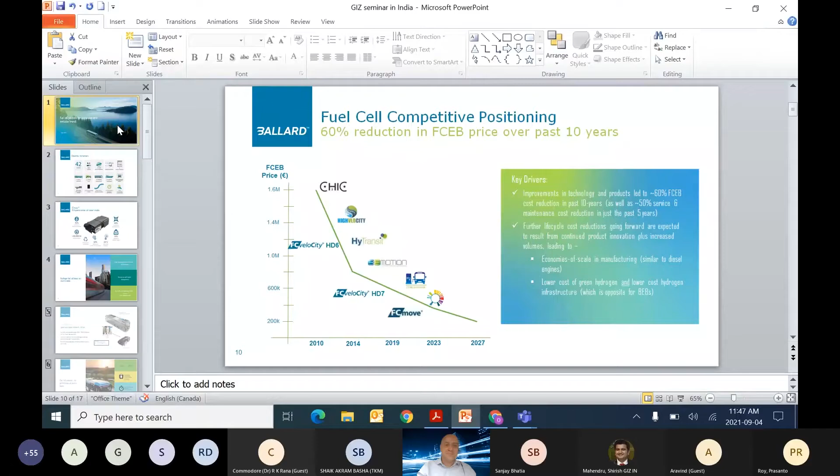So you would have about 10 minutes. Yes, sir. Okay, here we go.

From 2010 to 2014, I myself lived 4 years in India. I stayed in Pune, Aurangabad, New Delhi, and Mumbai, and I keep this memory in my head very fondly.

Just to mention briefly about Ballard, we have been designing, manufacturing, and selling fuel cells for more than 42 years. The company now has a little bit more than 900 employees, fully focused on fuel cells. We are omnipresent in e-mobility, with about 1,300 fuel cell buses globally running with Ballard fuel cells, over 2,200 trucks of various kinds running with fuel cells. We are involved in 6 train projects and 8 ship projects, and we also design and provide fuel cell stack technology for various automotive OEMs.

So far, we have produced close to 1 gigawatt of fuel cells in-house, and about 6.5 million MEAs. We do our R&D in-house. Our vehicles with Ballard fuel cells have absorbed close to 100 million kilometers, providing very important input to our future product development. Our stacks have also achieved a milestone of 35,000 hours lifetime without an MEA change. As a company, we are fully committed to carbon neutrality, aiming at 2030 to be fully carbon neutral as a corporate.

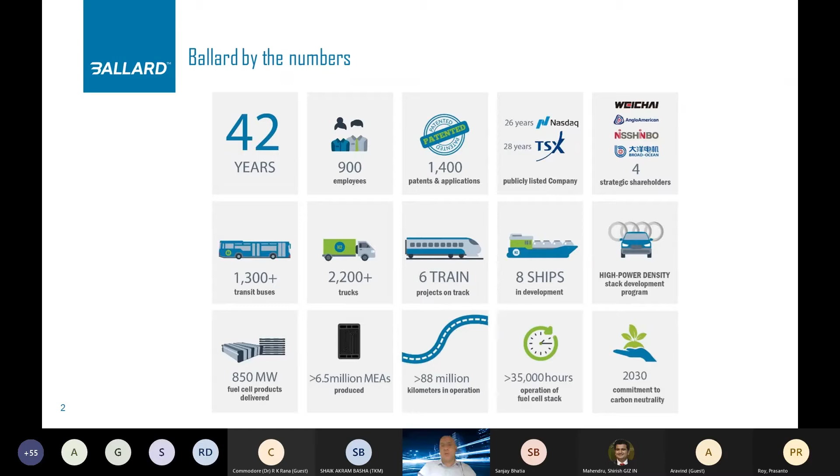This is our 8th generation fuel cell module. As mentioned, a number of vehicles have Ballard fuel cells, and in the past we developed 7 generations of fuel cell. From generation to generation, we have focused on lowering the TCO and increasing the features of the products. In this 8th generation, which we are now shipping on a serial basis to our vehicle OEMs, we have achieved a 35% reduction in total life cost, including both the CapEx and the OpEx of the product.

How have we done this? We have focused mainly on durability, increasing the durability of the stack as well as working with our industry partners to increase the durability of the balance of plant components, and also improved the design of the product, simplifying it from generation to generation. In this specific generation, we decreased the number of components by integrating certain functionalities, by 50%. This lowers the preventive maintenance cost, lowers the corrective maintenance cost, and increases the reliability of the product.

Overall, we achieved a 40% reduction in the product volume, increased the power density, and lowered the weight of the product. In many applications, the weight is very critical, so lowering the weight allows either carrying more goods or more passengers. We also added some cool features like freeze start capability from -25, which is important especially where I live in Europe, in the northern countries, where there can be severe winters.

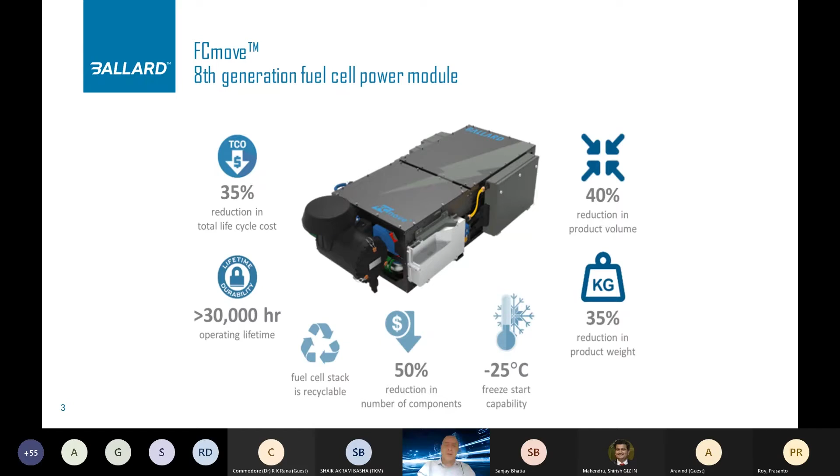I want to mention a couple of things, especially how we aim to decrease the TCO, using fuel cell buses as an example. The first point is that fuel cell buses are electric buses, and there's sometimes a misperception in the market that they are treated differently, but they share the same electric drive as battery buses. It's a hybrid battery fuel cell combination, and both technologies have their strengths, so combining them brings a very strong value proposition.

We have lots of OEMs now on the common platform, offering their zero-emission buses. It can be a battery bus, but depending on the application, they can also change some of the battery compartments with fuel cell and hydrogen and offer fuel cell buses. That's what our OEMs do.

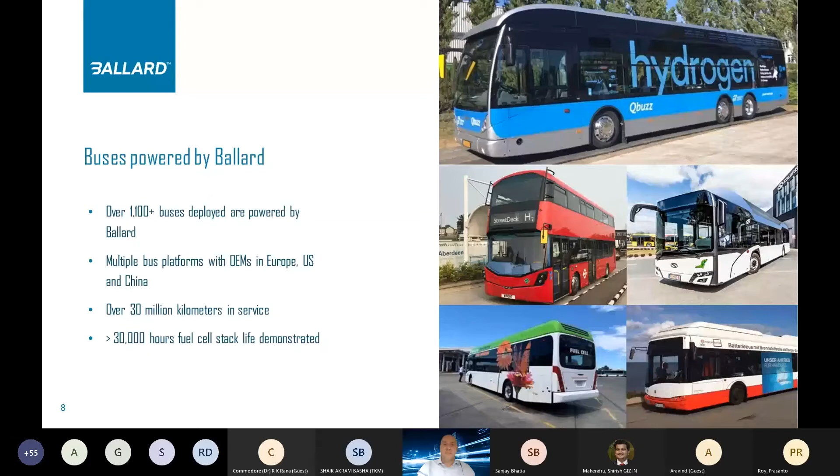There are a couple of examples I give here. On the top you see a triple axle 12-meter bus, and on the right side in the middle you see a double axle fuel cell electric bus. Double deckers are very popular in some countries, so we see an increasing number of double deckers in, for example, the United Kingdom. In places like China or some other countries, 9-meter or 10-meter buses are also very popular. We also have buses with Ballard fuel cells and articulated 18-meter buses. So the product platform is increasing day by day.

There are some reports that have been done by the Hydrogen Council, or together with partnerships with Ballard, for example with Deloitte, based on deep analysis. All these reports show that there will be a timeline in the near future where fuel cell electric vehicles will be either equal to or cheaper than operating battery electric vehicles or internal combustion engines, depending on the application, of course. This is not a one-size-fits-all situation. Electrification is a big problem to tackle, and we believe fuel cells are an important part of the solution.

I'll give you some examples of how that's happening. Here you see a fuel cell bus price, how it reduced over the last 10 years. 10 years ago we were doing demonstration projects of 1-2 buses. We have been involved in European demonstration projects since 2004, from the very first bus put on the street in Europe. As of end of 2021, there will be 220 fuel cell buses in Europe with Ballard fuel cells. But generation over generation, the price of the fuel cell bus came down from upper million euro prices to almost 500,000 euros in tenders today, and we expect that to go down to below 300, approaching 200 in the future.

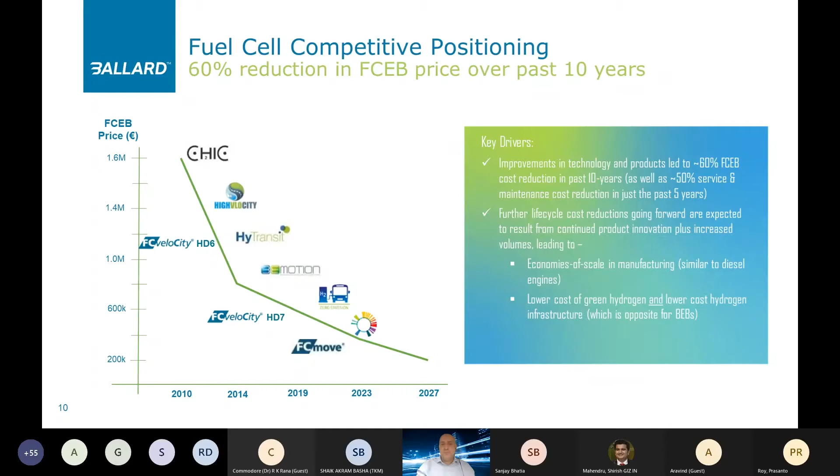I'll give you some performance criteria which allow the TCO to come down. We have proven more than 450 kilometers of range in the field, fuel consumption less than 8 kilograms per 100 kilometers, and fuel cell stack durability over 30,000 hours, actually 35,000 hours, proven in revenue service.

So these are not demonstration projects that run empty, these are buses that carry passengers online and deliver service to customers. At this moment, in our various programs, our customers are able to offer fuel cell bus maintenance cost of 0.3 euro per kilometer. There's a target with a number of partners to bring that down to 0.2 euro per kilometer for a 12-meter bus, and within that we are also aiming to bring fuel cell maintenance cost below 0.1 euro per kilometer. That includes preventive maintenance, corrective maintenance, labor, all the things you need in the LCC.

We have also proven fuel cell module availability. At this moment, over 100 buses are running on the street, and we track every day the performance of the buses. We have over 97% availability of the fuel cells, and we track other environmental conditions required in cold or warm climates, such as freeze start, which is especially important for colder requirements.

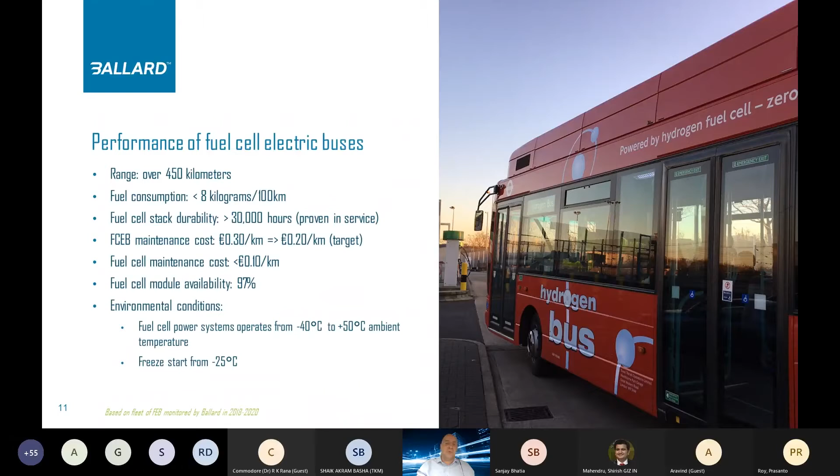There are other reports which show when we will reach this equilibrium, and it's of course a hydrogen economy question. It's not only the vehicle, not only the fuel cell, it's also the fuel, it's also other services. But if you look at various reports, either from the Hydrogen Council, McKinsey, or Deloitte, you see a timeline around 2023, 2024, 2025. That's where we expect fuel cell electric buses will become either equal to or cheaper to operate than various other technologies.

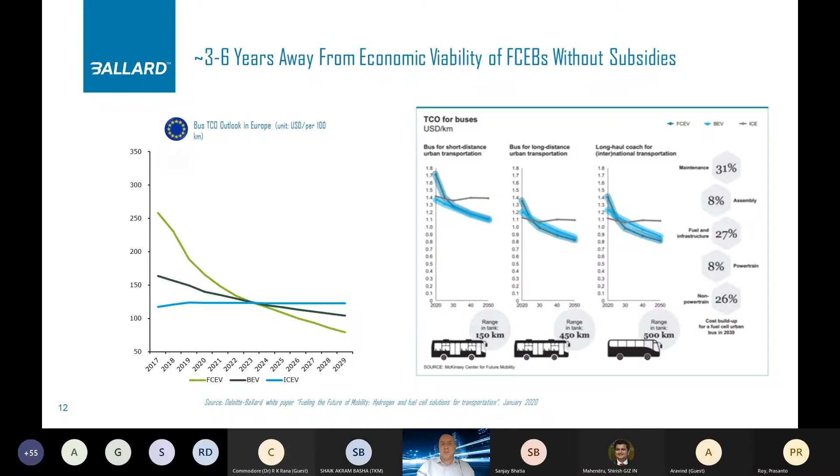Our experience in the past is that talking to fleet owners, when you want to operate a few buses and demonstrate the technology, it's always easy to start with battery electric buses, because building the initial infrastructure is easier. But when you start scaling up, then the infrastructure becomes a big bottleneck. And as the scale up comes up to the reality, then operators understand...

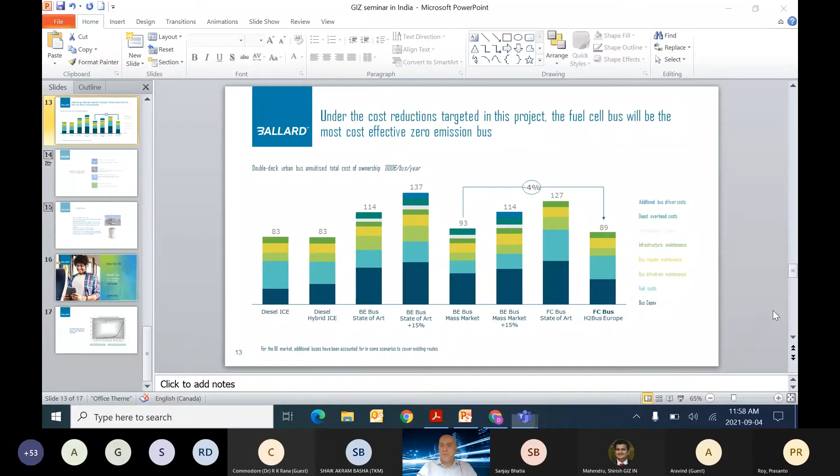But I will not go into details. I believe there might be questions from the participants, given the time limited. I'll be happy to share further details of our calculations later. But the key message here is when we include all the aspects of technologies and cost together, vehicles and fuel and infrastructure, definitely hydrogen is a clear alternative for fleets, especially when the scaling up comes, where you deploy 50, 100, 200 and more buses. Fuel cell buses are very good alternatives that provide strong value proposition.

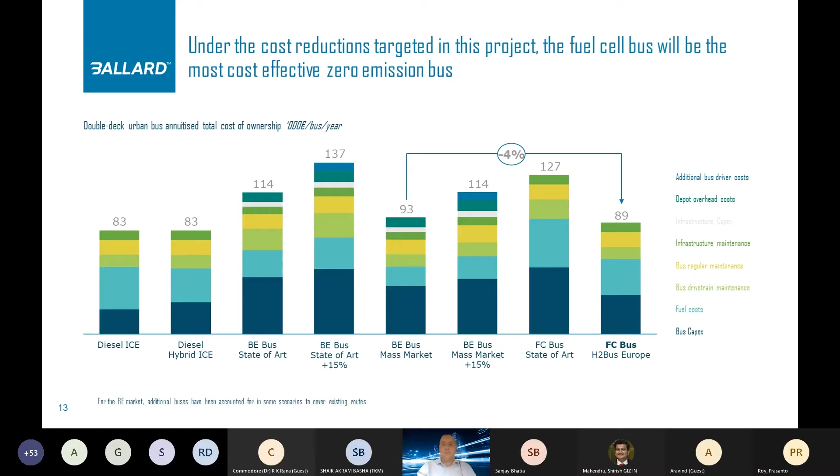And we are also very happy to see that hydrogen and fuel cells are taking more and more attention and reality in India. Recently, we have received an order for 15 buses. We are going to provide 15 fuel cells for those buses to India and started to build up our capabilities. We are opening actually a service center in India with those buses, and from there we'll go to the next level. Thank you for listening.

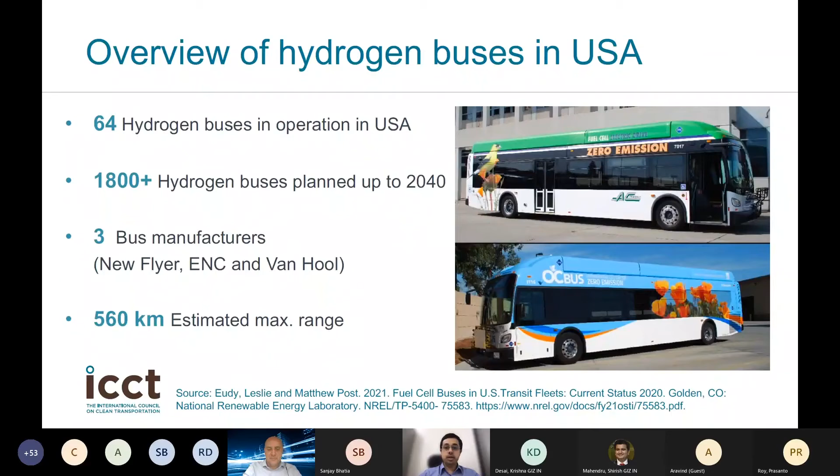So let's talk about the performance of fuel cells. The earlier presenter also talked about how the fuel cells are reliable, and this study also shows that. This is the data from NREL, and the real world operations have shown that fuel cells are robust indeed, and they have lasted for over 25,000 hours, which translates to around 4 to 6 years of operations on average, and the maximum has been over 32,000 hours. 20% degradation in fuel economy was observed after around 17,000 hours of operations, and it is expected to improve as the technology matures. Transit agencies usually replace the fuel cells once they stop meeting their requirements. This is quite similar to a mid-life diesel engine overhaul that takes place usually after about 5 or 6 years, wherein they completely take the engine apart and perform some major maintenance activities. So next slide, please.

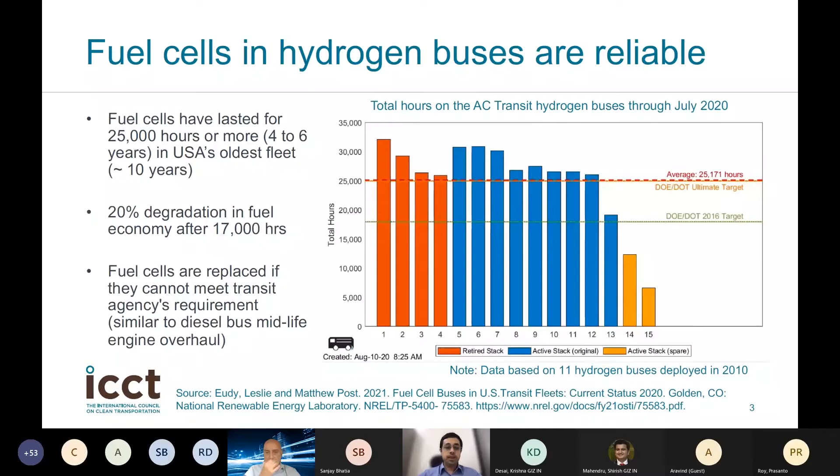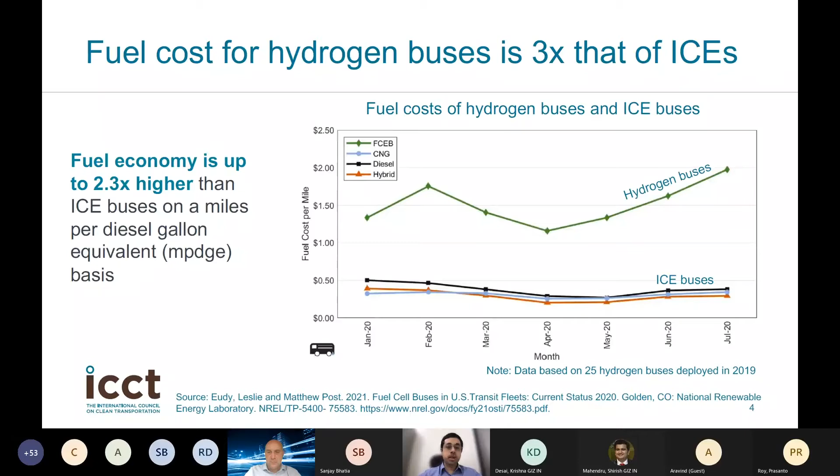So we all know that fuel cell electric vehicles are more energy efficient than their ICE counterparts. The fuel economy has been observed to be about 2.3 times more than the ICE buses. But despite the higher fuel economy, the fuel price has been 3 times more. So this remains a challenge currently. Next slide, please.

ICCT's analysis of costs of various fuel powertrains in Brazil from 2018 have shown that the total cost of ownership of hydrogen buses was about 90% higher than diesel buses. This is mainly because of high operational and acquisition costs. But both are expected to fall as adoption picks up and the cost of hydrogen comes down. And a key point to note is that battery electric vehicles have already achieved cost parity in Brazil.

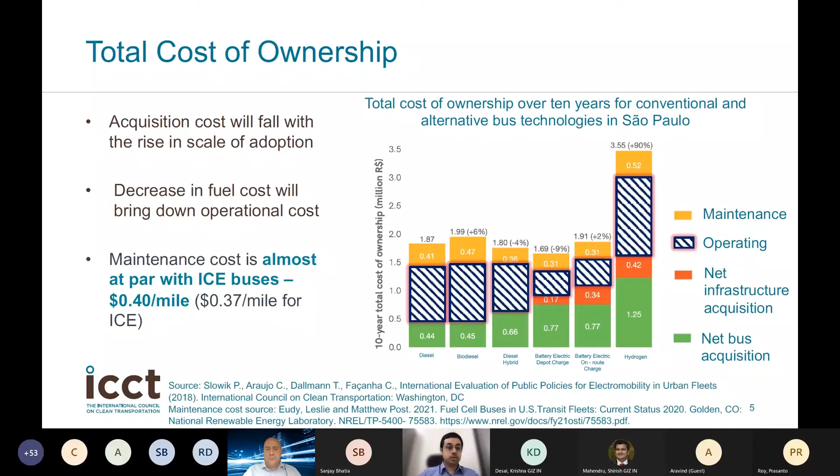And if you take greenhouse gas emissions and health benefits into account, the TCO will actually be lower than diesel buses by around 27%. NREL's study has shown that the maintenance cost of hydrogen buses is at par with ICE buses, so the costs are pretty similar there.

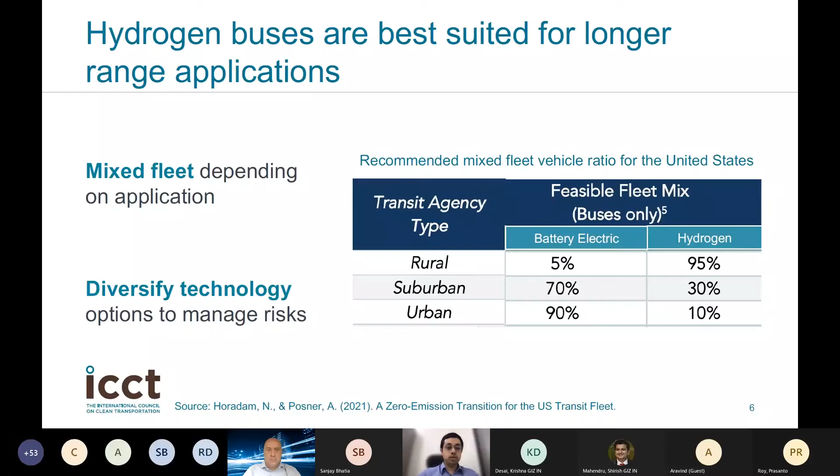Hydrogen buses are best suited for long range applications because they offer longer range. So transit authorities can opt for a mixed fleet depending upon their requirements and nature of operations. This will also help them diversify technology options and manage risks better.

Now that we've understood the performance and costs of hydrogen buses, let's see how we can implement a zero emission goal. Political commitments at the national and state level are very important, and India is actually very fortunate to have that. But we also need a clear zero emission fleet transition goal at the state and national level. The next step is to define a fleet-wide strategy to move to zero emission operations. The strategy would include technology, infrastructure, operations, and most importantly the cost. Once we have a plan in place, it makes vehicle deployment and public tendering smoother.

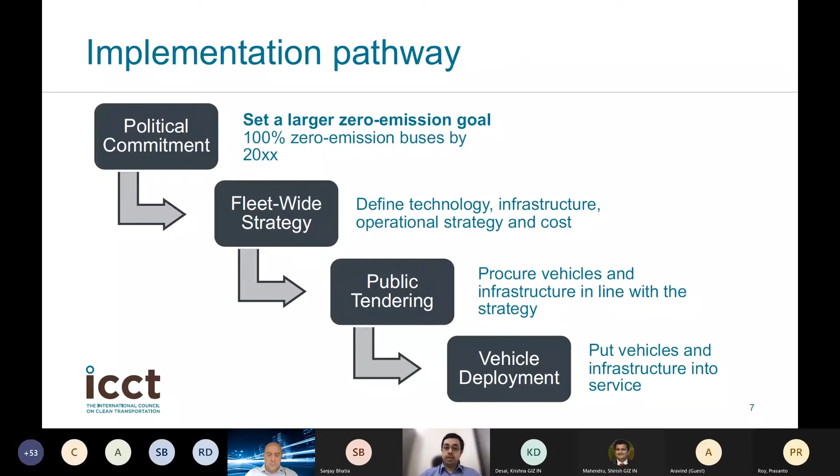Let's take a look at how California is doing it, because California has a commitment at the state level to cut greenhouse gas emissions by 40% by 2030 and 80% by 2050 of the 1990 levels. It has also set a target to reduce petroleum usage by 50% by 2030.

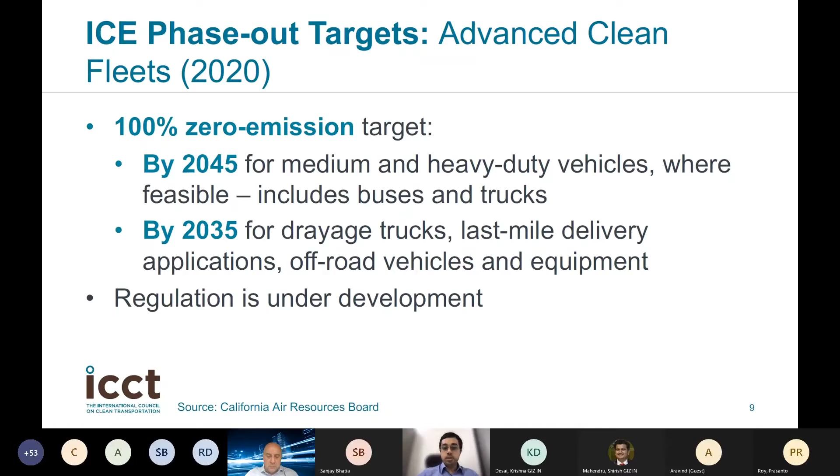All of this has motivated them in defining ICE phase out targets under the Advanced Clean Fleets program. This regulation is currently under development, and they're looking for 100% zero emission transition to medium and heavy duty vehicles by 2045.

The next regulation California has is a fleet purchase requirement under the California Innovative Clean Transit program. Their 100% zero emission bus purchase requirement is required for all transit agencies by 2029, and there's a mandate to move to 100% zero emission operations by 2040. Transit agencies are required to prepare zero emission rollout plans, and they're also permitted to go for joint procurement to aggregate demand at the state level.

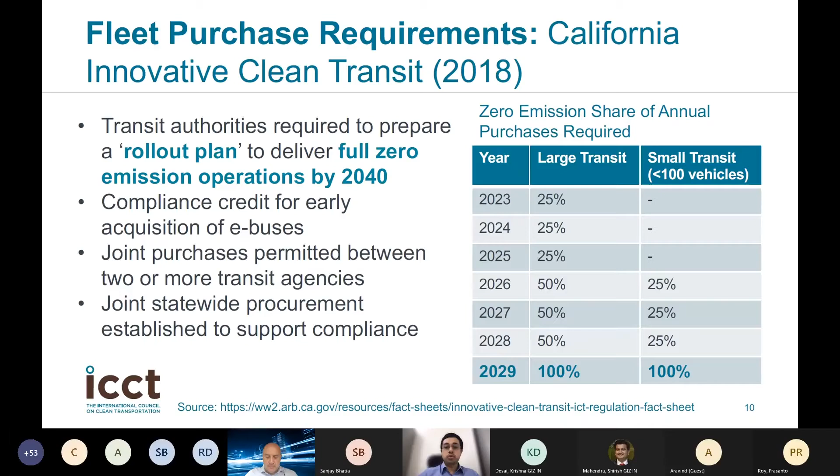To support this zero emission vision, California is providing fiscal incentives under the HVIP program, ranging from $20,000 to $240,000 incentive per vehicle for medium and heavy duty vehicles. To make the process easier, the incentive is applied at the point of sale, where customers only pay the discounted price of the vehicle, and about 96 million dollars worth of incentives have already been claimed in 2021.

The overall zero emission policy framework is actually a basket of various programs, including both sticks and carrots. There are programs to push adoption using mandates and regulations in the form of ICE phase out targets, fleet purchase requirements, and performance standards. California has also established some pull factors to encourage adoption in the form of fiscal incentives and infrastructure programs.

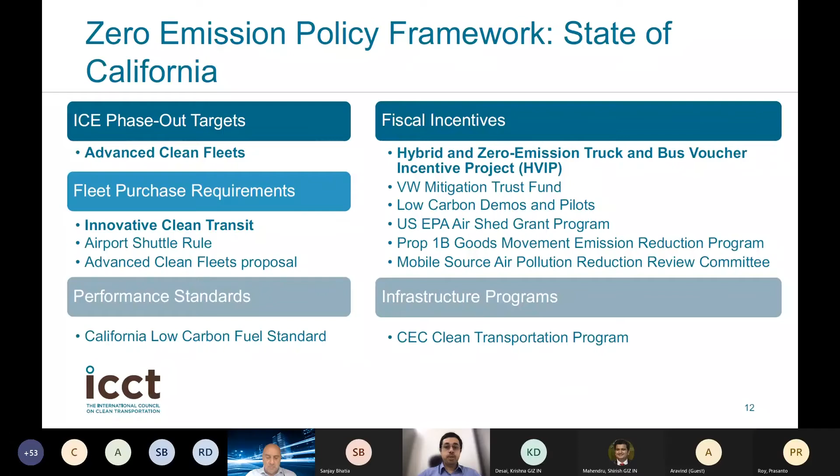To conclude, there are definite niche applications for hydrogen buses, which can complement battery electric powertrains. Hydrogen fuel price is an impediment at the moment, and innovations in storage and distribution systems are important to reduce costs. Hydrogen fuel cell technology is more expensive today, but it is expected to fall with increase in the scale of adoption. Batteries benefit from more use cases and larger volumes of production. Finally, we need to use green hydrogen to address climate impacts.

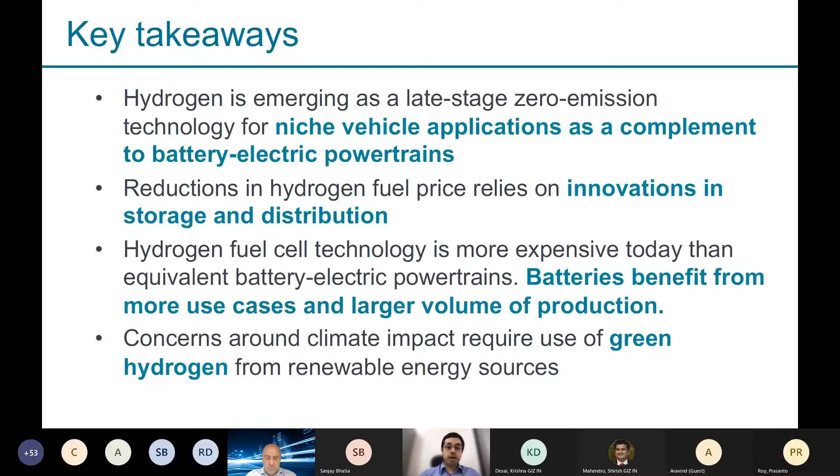As a parting thought, we should really focus on the zero emission goal. India is already making good progress on the electrification front, and we should continue with that effort. There are multiple pathways that lead to the zero emission goal, and hydrogen is definitely one of them. Thank you.

Sanjay, hello. Hello, Sanjay. I think Sanjay is...

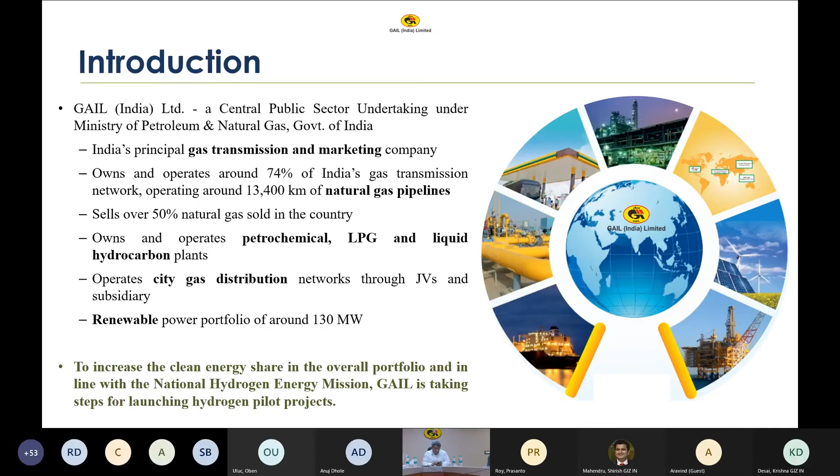This introduction was necessary for the context of hydrogen, because it helps explain why our business is relevant and how it can play a role in the hydrogen vision.

We have already heard a lot about India's hydrogen initiatives, and the Honorable CEO of Niti Aayog has given in detail the concept and vision of India about hydrogen. But let me tell you that we at GAIL are primarily focusing on hydrogen blending in the existing natural gas pipeline network and the city gas distribution network, because that's where we come from. We are also focusing on HCNG, hydrogen mixed in CNG, for the transport sector, to reduce pollution and also to displace a part of imported gas, which is costing a lot to our exchequer.

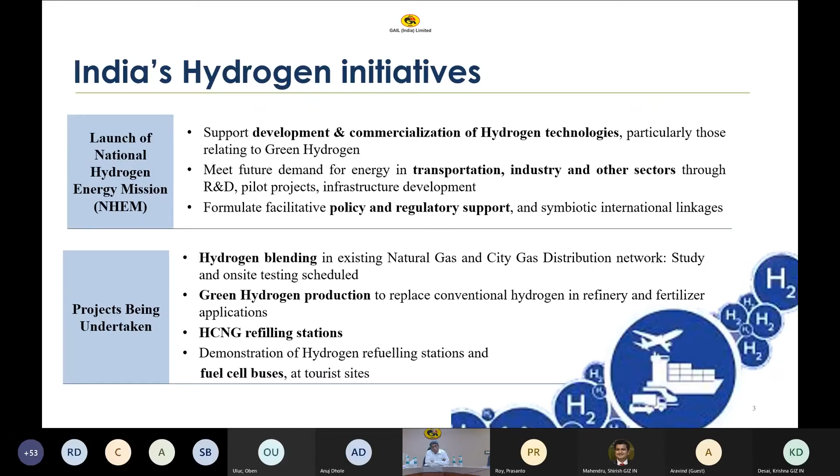As we see, in GAIL we are following a two-pronged approach. The first thing is that we are trying to conduct studies on how much hydrogen we can blend in natural gas safely without making any modifications in the transmission network and downstream segments, and therefore do some demonstration and pilot projects there.

The other thing we will do is a more in-depth study to figure out the maximum hydrogen that can be put in the pipeline network and city gas distribution network with minimum modifications, so we can transport a significant amount of hydrogen with natural gas. The second stage we are following is to do pilot scale and demonstration projects before we go full-fledged on commercial scale projects.

To begin with, we had done a study through one of the reputed consultants. They studied what work is being done globally by other countries and various companies. Based on that study and their own in-house research, we concluded that if we have to immediately start a pilot project, it would be good and safe to have 2% hydrogen blending in natural gas, and that would not have a significant impact.

Based on the outcome of that study, we decided to start a pilot project in one of the city gas distribution networks we identified, where we supply green hydrogen. Our focus is primarily on green hydrogen, because that's how the objective of reducing emissions and imports would be met. We have identified one city gas distribution network, and there we are going to do certain modifications for blending 2% hydrogen in that network.

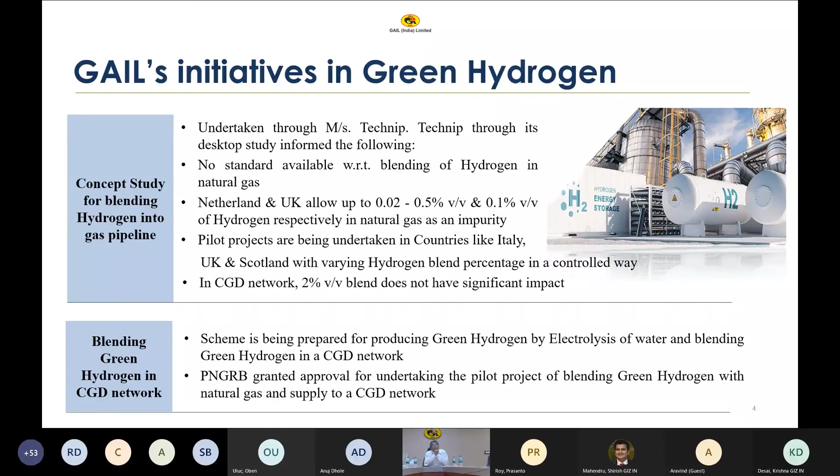As some of you may already be aware, the gas distribution network is regulated by PNGRB, the Petroleum and Natural Gas Regulatory Board. It was important for us to take approval from them, because the composition of gas that can be transported through the pipeline network is regulated by PNGRB regulations. We have already taken approval for this 2% blending in the city gas distribution network. What we are going to do next is set up an electrolyzer, generate hydrogen, and supply that hydrogen to the city gas distribution network.

This next step is based on the 2% blending of hydrogen. But going forward, we need to figure out the maximum hydrogen we can blend in the pipeline, trunk pipelines, and city gas distribution. So we are doing another detailed study to determine what maximum percentage of hydrogen can be blended in gas without making much change in the existing pipeline and associated facilities. Prima facie, we see that maybe around 20% volume of hydrogen can be blended with minor modifications, and what those modifications could be will emerge from that study. The main focus will also be on ensuring there's no impact on safety and integrity of the pipelines.

On ground, what we are doing is, as I said, in one of our installations we are going to set up a 10 megawatt electrolyzer at a place in Vijaipur, in the state of MP. This will produce about 4.5 tons per day of green hydrogen. We intend to supply part of this hydrogen to nearby fertilizer units and also to the city gas distribution network, either by blending into the existing gas pipeline, or we would also do a study on whether we need a dedicated pipeline for transporting only hydrogen.

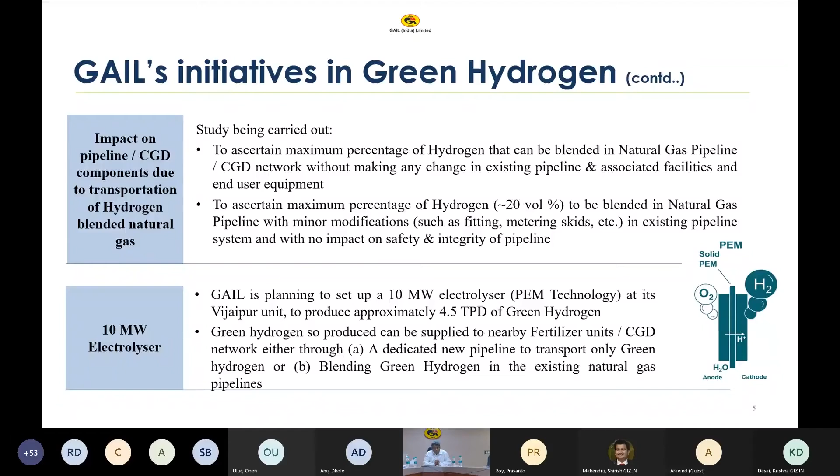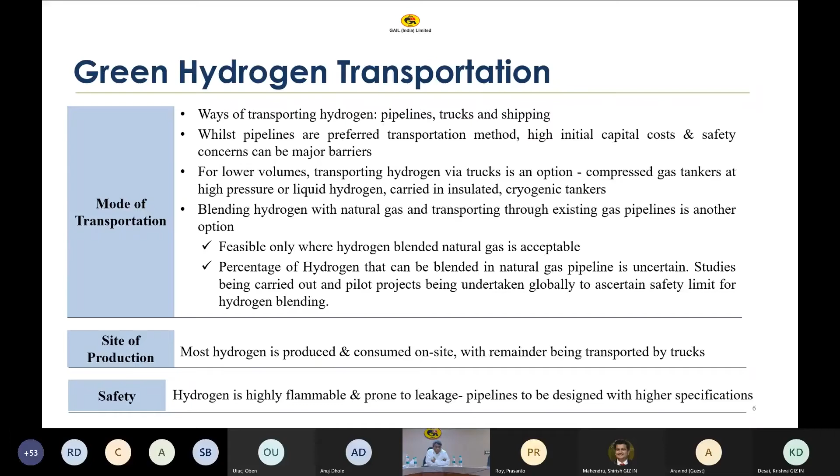Let me come to the transportation part and share with you that there's already one HCNG project that was run in the city of Delhi. Many of you would be aware that the Supreme Court in 2019 had suggested looking at hydrogen run vehicles in Delhi, in the background of the fact that there's a lot of pollution in Delhi, especially in the winter months. In order to curb that pollution, various mechanisms and schemes are being worked out, and one of those schemes was to look at hydrogen run vehicles.

As per the directive from the Supreme Court, one of our joint venture companies, IGL, and one of the oil marketing companies, IOCL, collaborated and put up a pilot project. This pilot project was not just for hydrogen vehicles, but for hydrogen CNG vehicles. A plant was set up for producing HCNG, 18% hydrogen in CNG, and this was used in 50 CNG buses in Delhi, which have been running for more than a year now.

The objective was to see the impact on emissions. What has emerged prima facie is that there is significant reduction in emissions, particularly CO emissions and total hydrocarbon emissions, mostly methane emissions. So this is one good step that has happened. The 50 CNG buses have been run, and it has been established that there is significant reduction in emissions.

But of course, this hydrogen was not green hydrogen, it was gray hydrogen. As a next step, we now have to generate green hydrogen and see how, technically and commercially, the techno-commercial feasibility of the project can be established so that the cost is not prohibitive and we can go for this HCNG project on a large scale.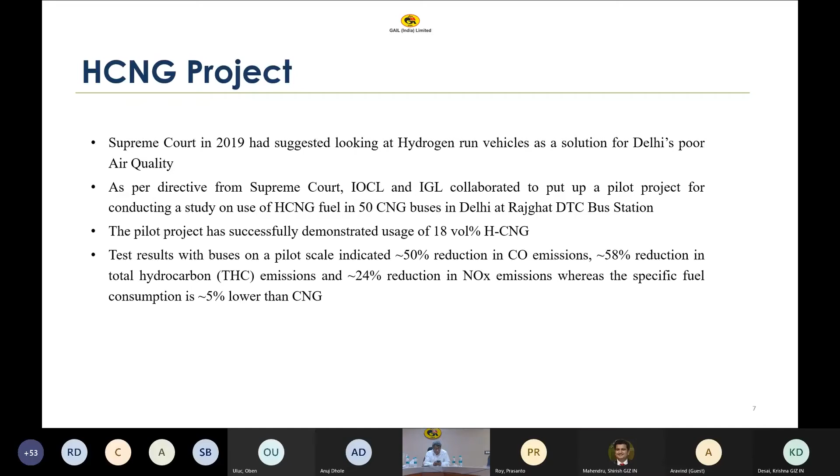Currently there are challenges all of us know. Specifically in India, there's hardly any availability of green hydrogen. There are some small plants here and there, but transportation of green hydrogen from those plants to consumption centers is again cost-prohibitive. So the option is to set up green hydrogen plants. Those are time consuming, but we need to immediately take steps and start moving on setting up these electrolyzers in place.

The way GAIL is doing it, we are already ahead in terms of getting various approvals and setting up that 10 megawatt electrolyzer. Besides that, transportation from the production place to the consumption centers is expensive, and even the production cost is expensive. What we have seen is about $5 per kg, which needs to go down significantly, to at least $2 per kg.

So also the challenge is exactly seeing how much percentage of hydrogen can be blended in natural gas, for which we have done one study, but a more detailed study is being done. Based on the outcome, we will be able to figure out techno-commercially how it will be feasible to transport hydrogen and use it not only for the transport sector but also the domestic and industrial sectors, so that we get multiple results in terms of curbing pollution and reducing imports that are costing a lot to the exchequer at the moment.

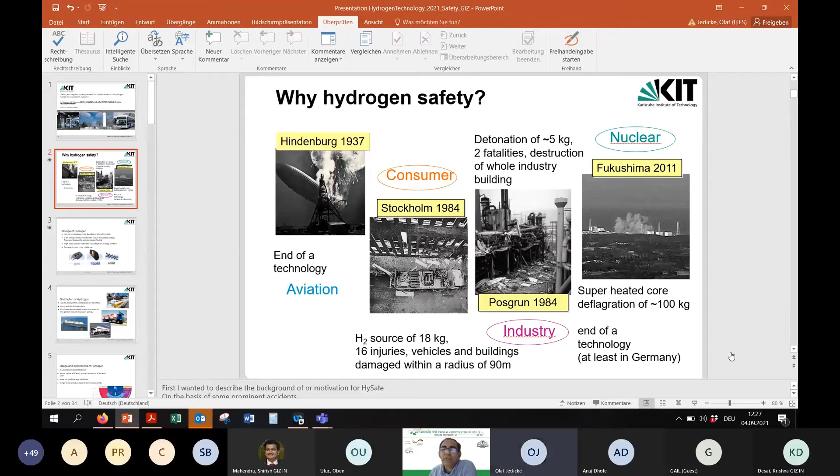Can you put it in presentation mode? Sorry, do I have this disturbing you? No, this is not in the presentation mode. Can you put that? Sorry, but my presentation is running here. No, from the bottom of the screen. So let me present it from my side. I can do it. Yes, of course, you can do that. Okay, thank you. Is this fine, sir? Yes, okay. Next slide, please. No, not the slide before.

Thank you. And as you can see here, some accidents happened with hydrogen. But what I like to highlight is it's not only about hydrogen. Most of the accidents that happened due to hydrogen were very popular and famous. For example, the Hindenburg, although there was an accident in Stockholm, and Porsgrunn, and also in Fukushima, which was the latest accident happened with hydrogen.

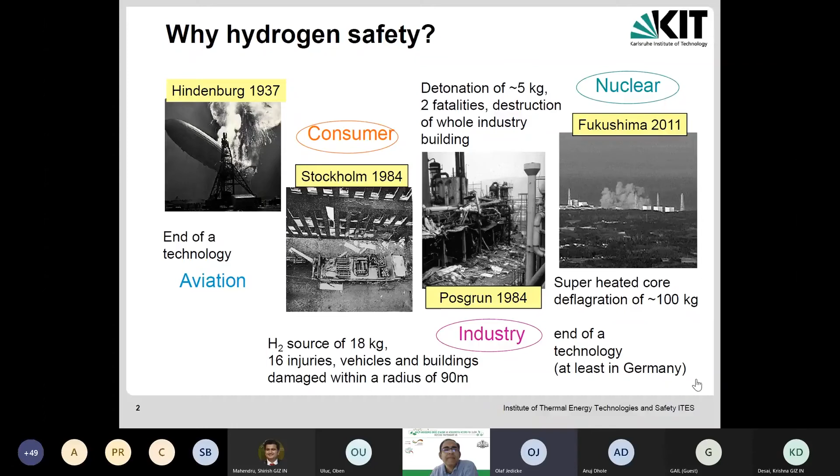But you see here, hydrogen could really raise an issue if you do not take care about the very clear physical properties in concerns of hydrogen. So next slide, please. Taking a look on, next slide, please.

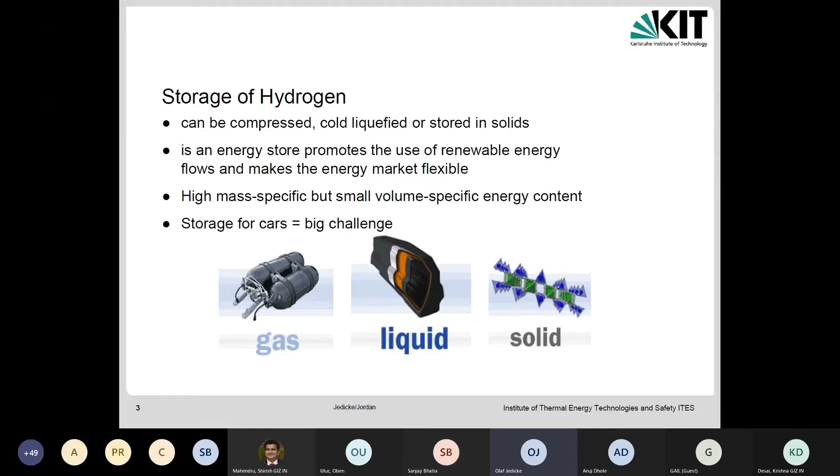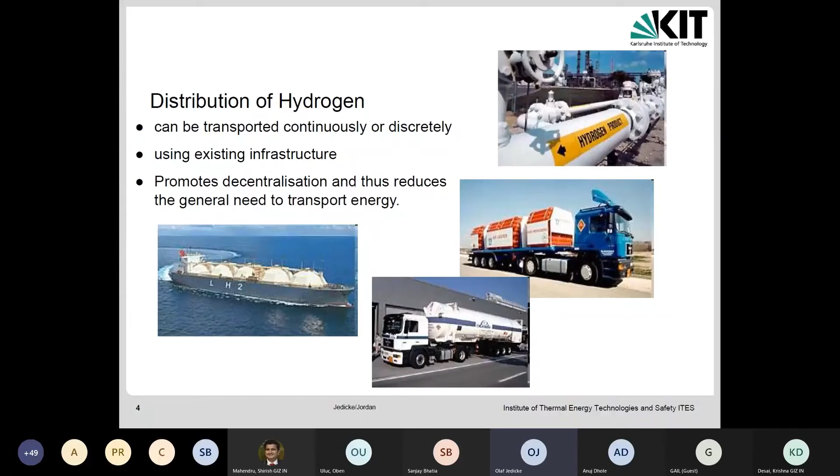Next slide, please. Yes, for example, also here we have the distribution of hydrogen. And as you can see, we will not have only transportation via roads or something like that, although meanwhile on sea, and also in the gas grids there is transportation. That means the transportation of hydrogen works very differently and raises also very different safety aspects. So next slide, please.

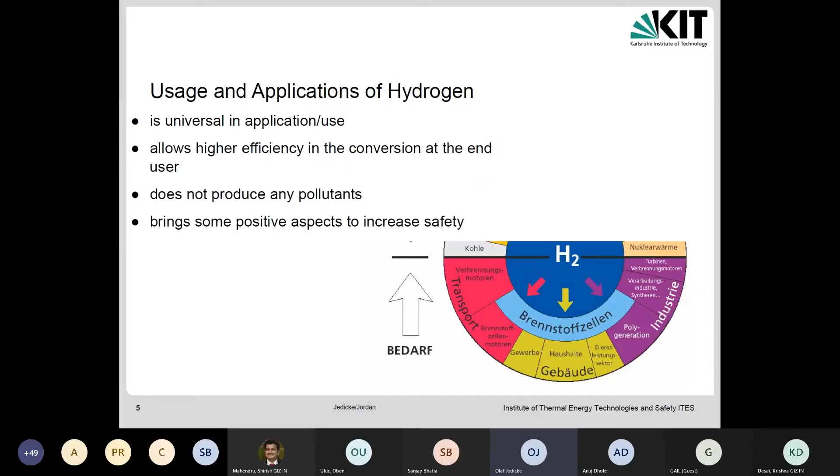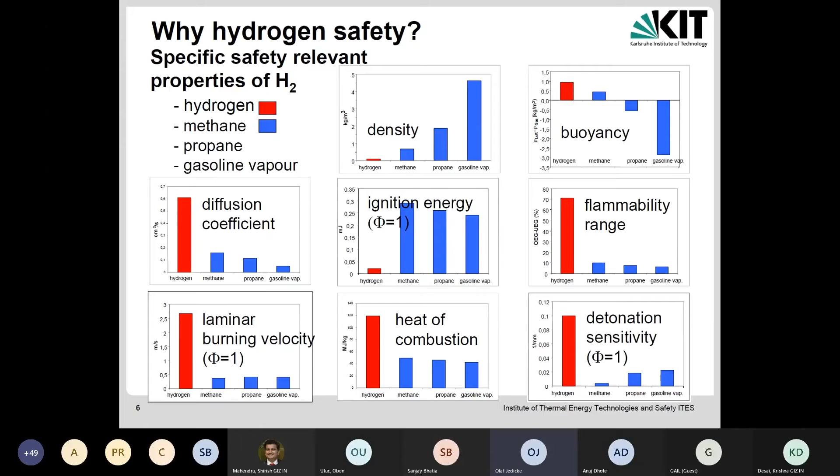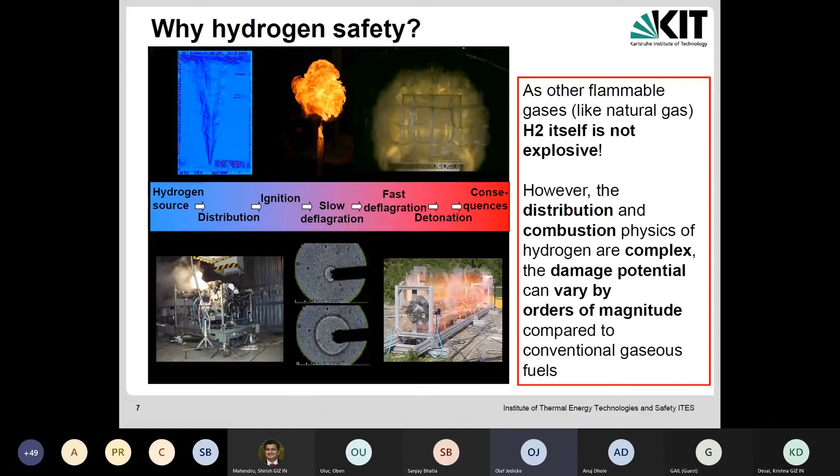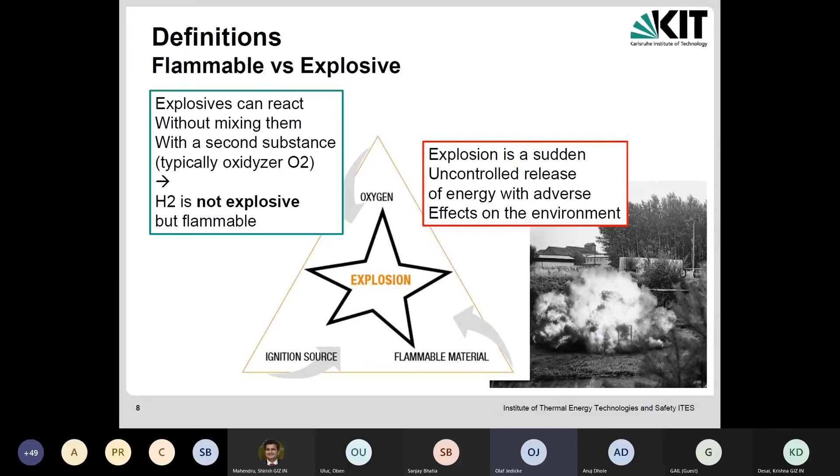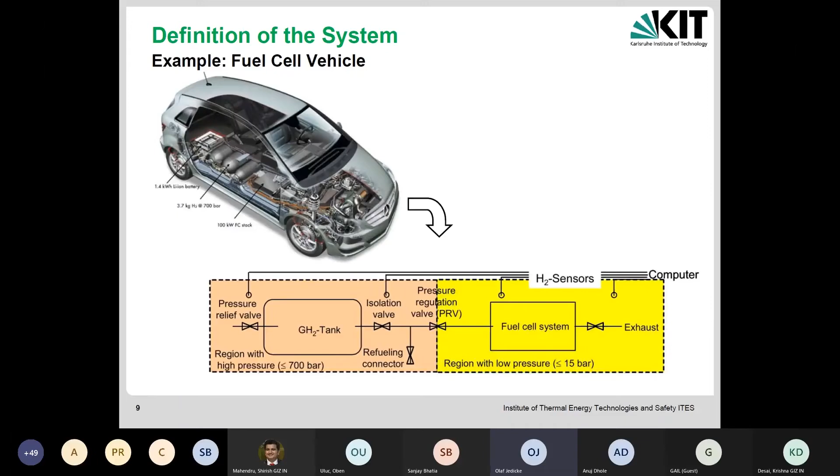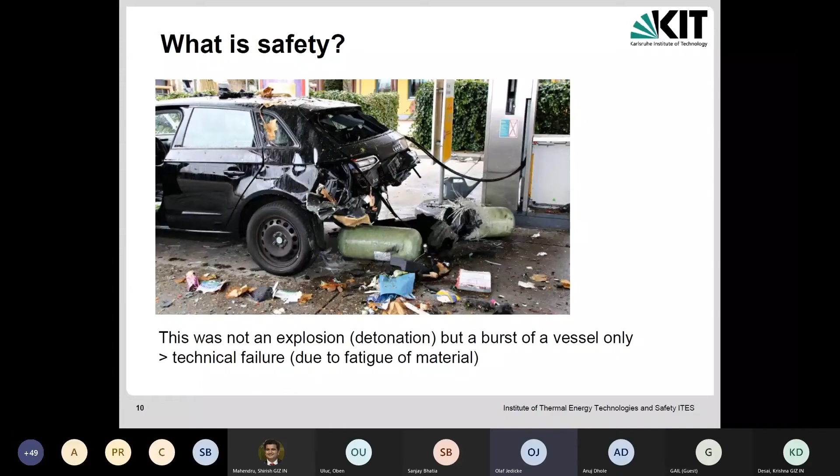Next slide, please, and you can see it here. This was one of the accidents that happened in the past two years. It was a passenger car at the filling station. And you can see here also, it was not an explosion. It was only a burst of a vessel, and you have to take care about that. Because of the physical properties, it was luckily not an explosion, because it was not ignited, but afterwards the whole car was destroyed.

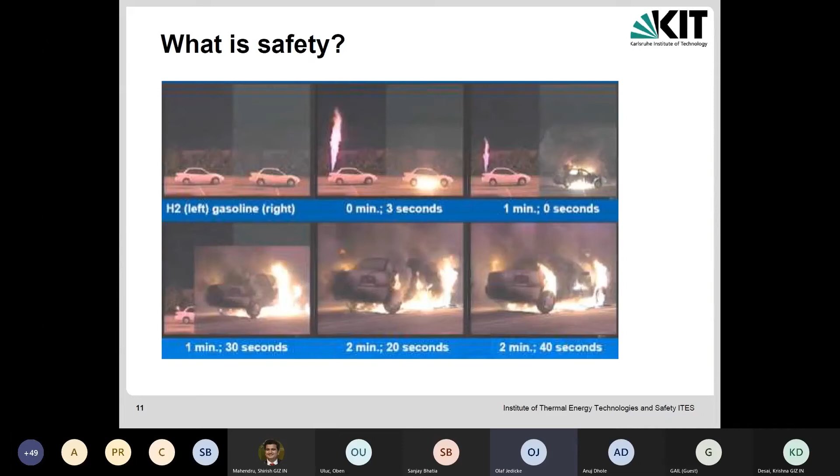Yes, and that's why we have to take care about the releases. That means at first you have a release, then a mixture with air, then you need a secondary effect and ignition, then you will have a combustion. This is also not a terrible thing, but then you will have a pressure load, and there you can come to an explosion. That's what we are working on at KIT and our test facility, which is a big one.

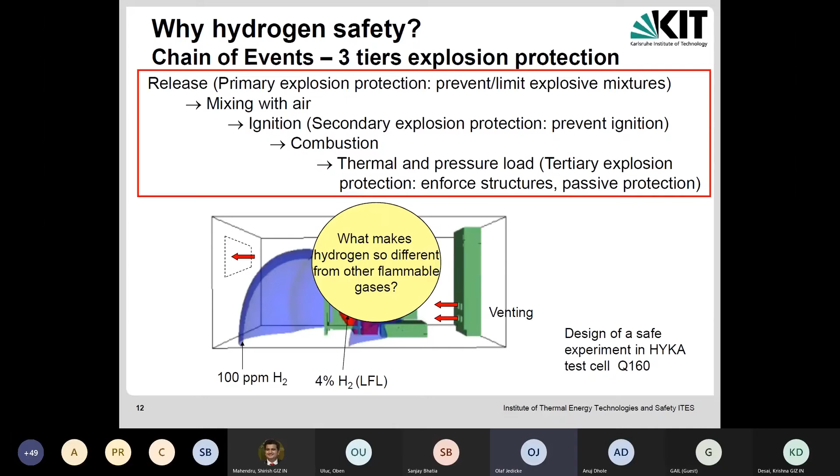Next slide, please. Brings me to the effect, what can we do? So if you start a project and you like to say something about the safety aspects, because running in public or whatever, you need each time to have some arguments about the safety.

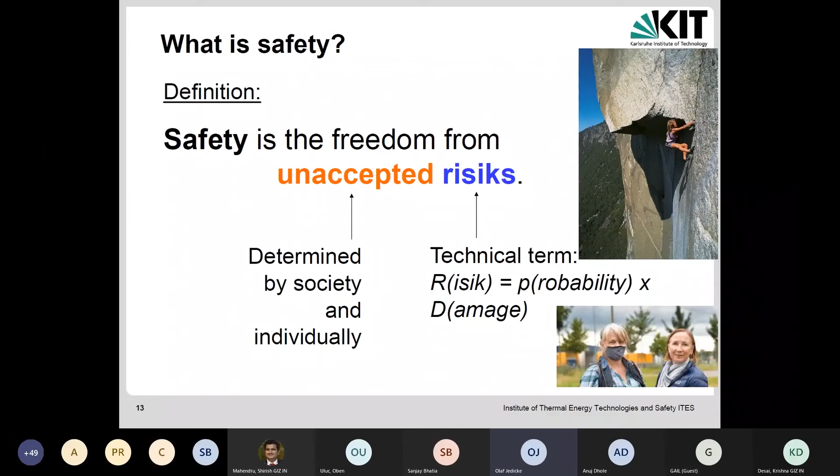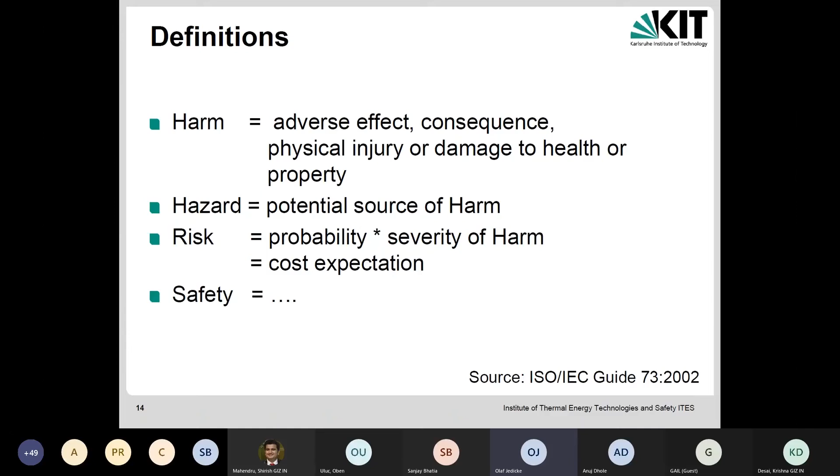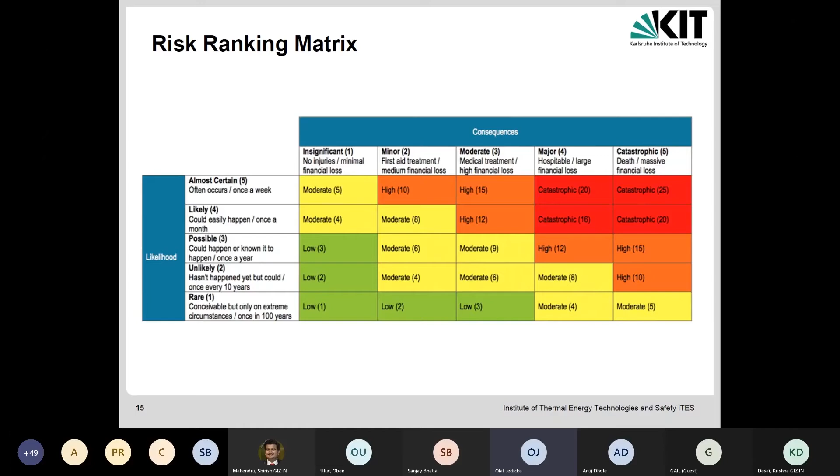Next slide, please. Yes, and here, while we can do that, you can also rank a matrix about the consequences, because no one will raise his hand if the consequences are zero. But if there will be consequences, then everybody will raise his hand and say, okay, we don't like to have a refueling station in the neighborhood or in the cities or whatever. So what you can do is rank a matrix with the consequences. As you see here, it's more or less about likelihood and also what could happen: catastrophic failure, major failure, moderate failure, minor failure, or insignificant.

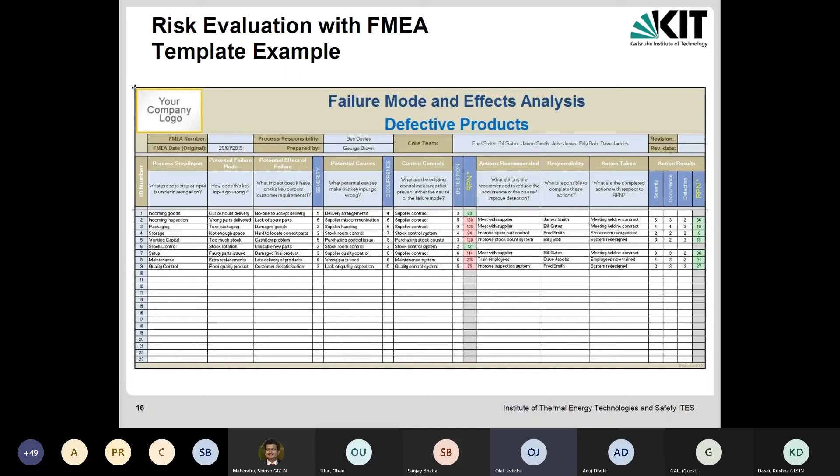Okay, next slide, please. So you can do this, for technical failure, by filling in a complete failure mode and effect analysis. This will help you, by doing this as a program, to get more or less a number for the safety, that means the risk failure. If it's 100%, you will do better not to. And if it's only up to 5%, it means the effect or failure will probably not happen.

And this works for all kinds of devices. What is a device? Probably a bus could be a device, but also a car, but also a vessel. And then you have also a complete refueling station. And then the list will expand, expand, expand. But at least you will get an answer on a technical manner, on a technical basis: is what you are running there safe or not?

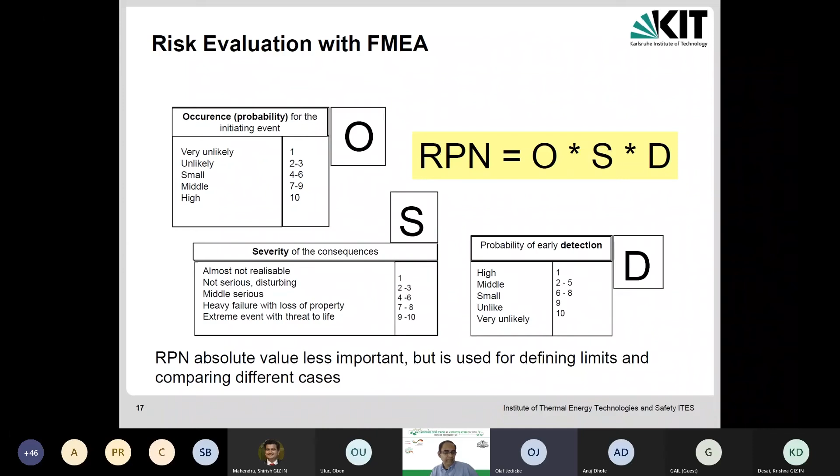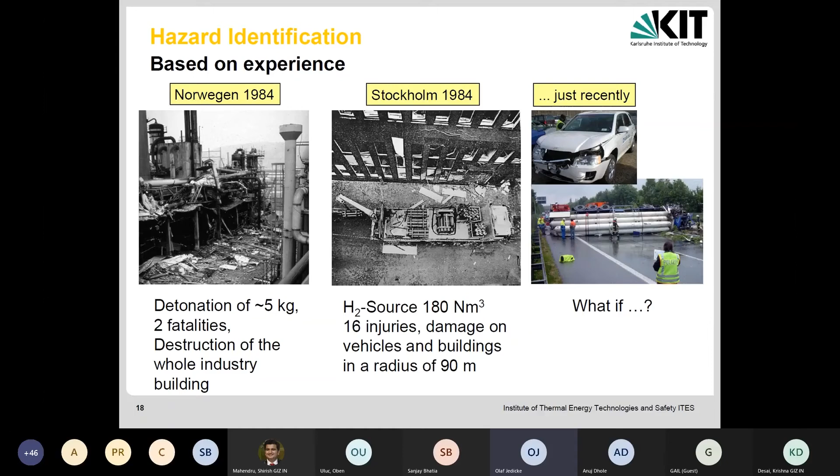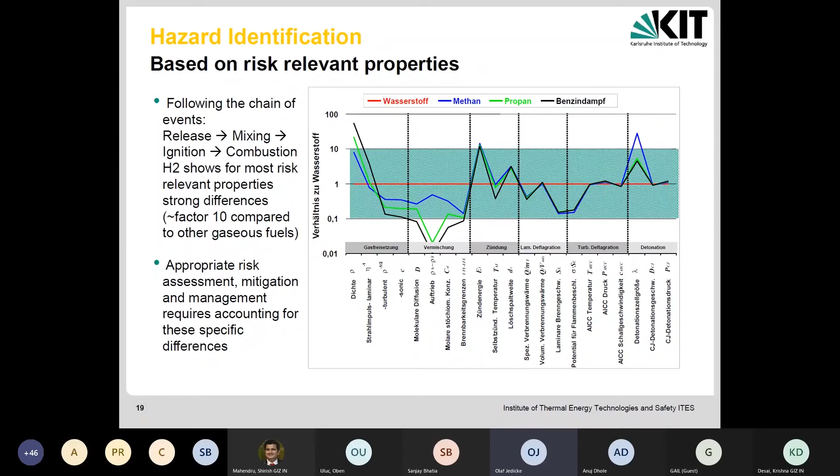Yes, and by collecting all the hydrogen specific events, we got in the past 300 hydrogen specific events, and out of that we have lessons learned. You can access this database, it's a running database by the European Commission, but also initiated by HySafe, to learn more about accidents that happened and to raise more sensibility to risk opportunities.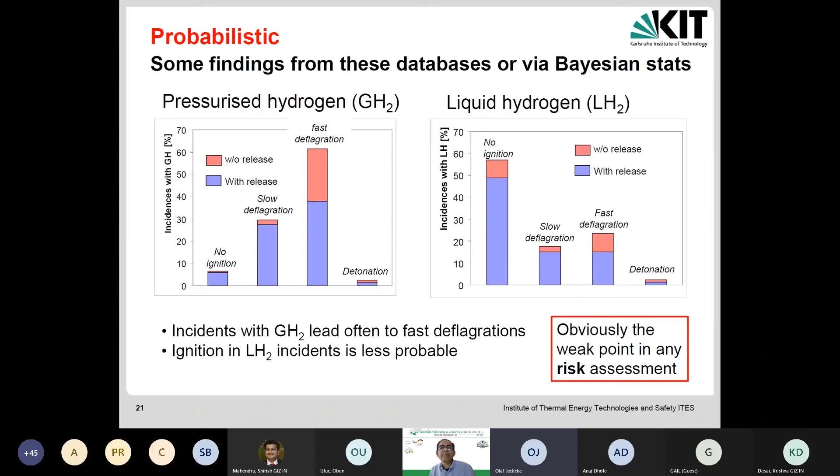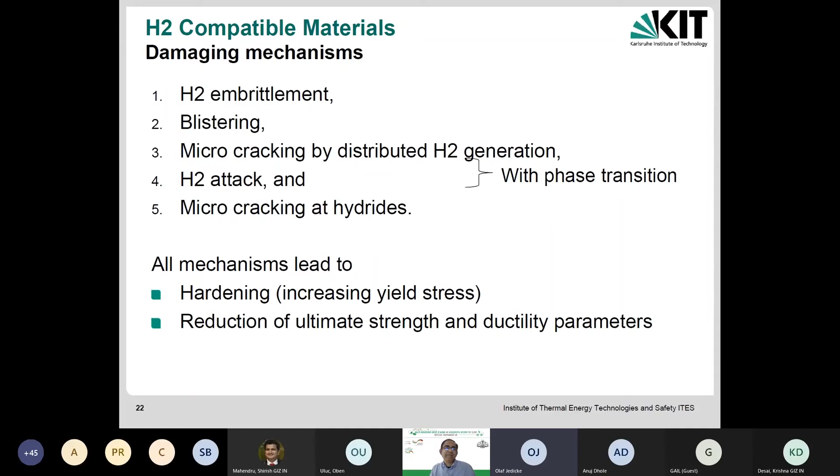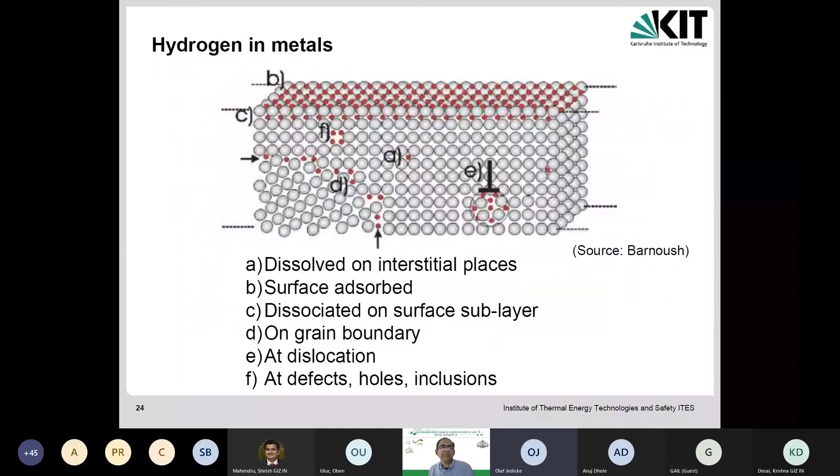Yes, then we have also completed this. We have also the compatibility with the materials. You know this, that we have hydrogen embrittlement. Yes, also this.

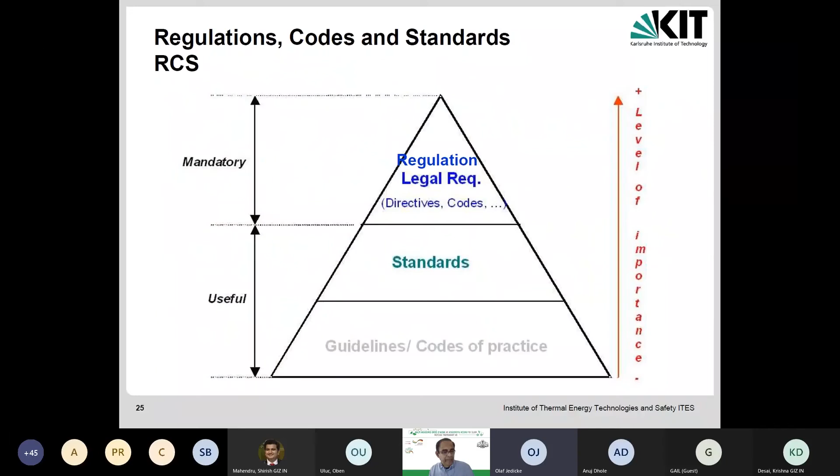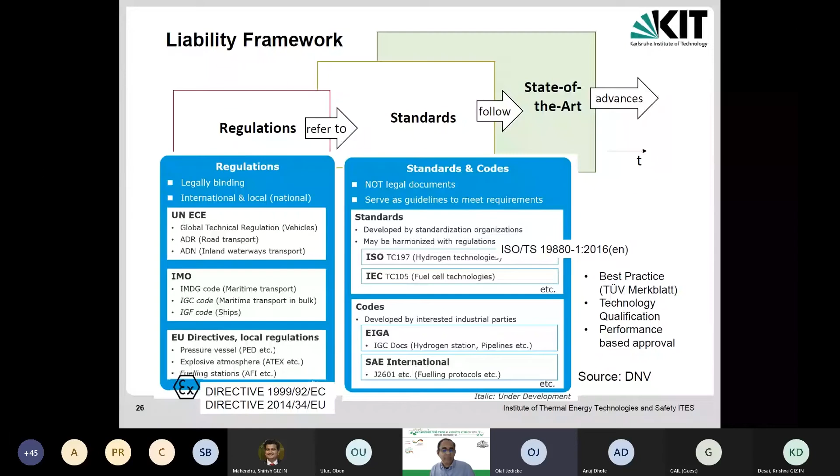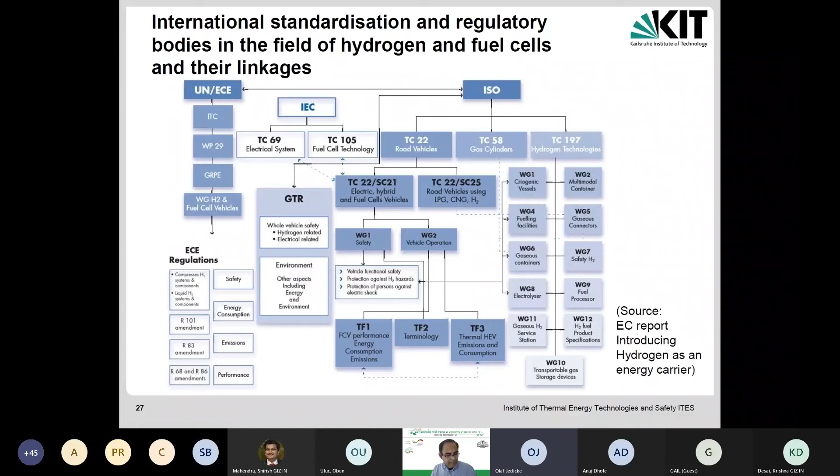At least I like to highlight one point: we have already regulations, codes, and standards. If you like to know which standards are working for which application, you can go to the liability framework. As you can see here, we have a lot of standards, listed here more completely, and you see there's an enormous list of standards, codes, and regulations.

If you like to get more information, you can go through all these ISO or TC levels. And also ATEX zone for a refuelling station.

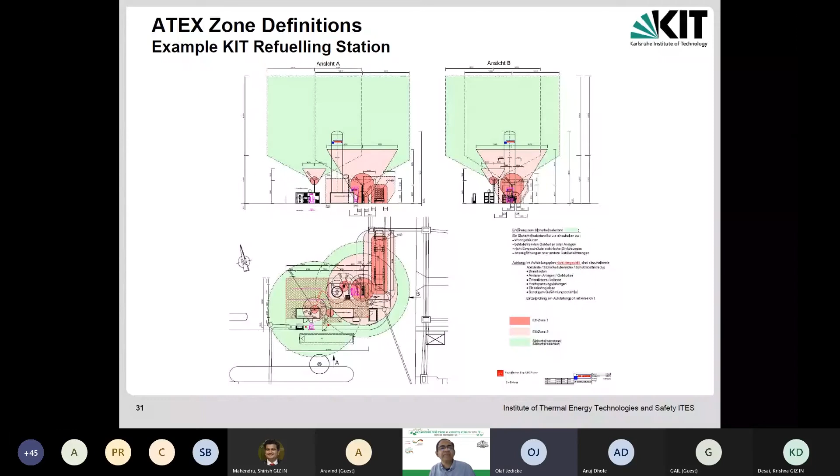There I like to conclude: we can handle hydrogen safe, this is clear. We can improve safety, remove further over-conservatism, but we have to design, and also we have to reduce costs of safety. We also have to look for the gaps and the missing knowledge, and we need more intensive information and exchange, to improve safety culture, not only in Europe or worldwide, but also in your specific region.

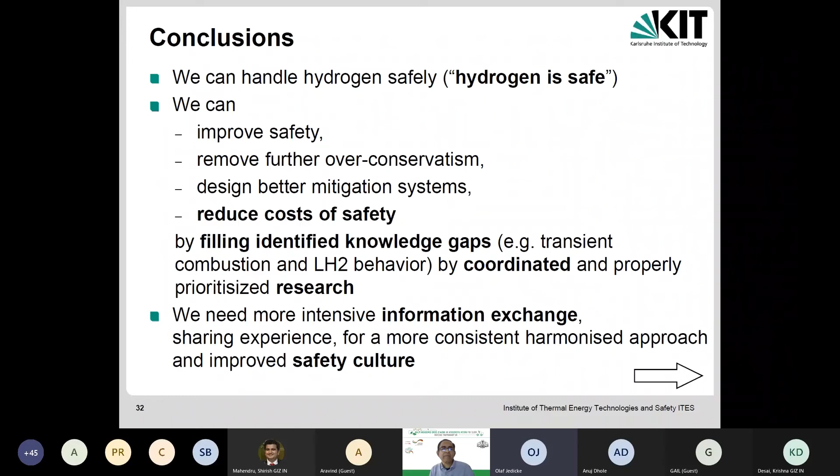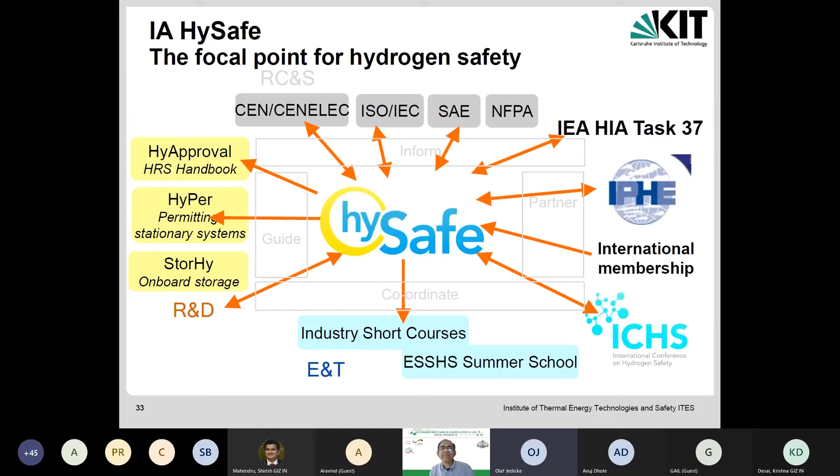This brings me to the very last slide, and many thanks to you for this invitation. If you like to see more, you can learn more about HySafe, which is an association running all the conference. That's my last slide. Thank you for your kind attention.

Thank you, sir, thank you very much. Thank you, Professor, for your good presentation on safety. Even though this was the last presentation, it was very informative, and we thank you for giving us this information. We look forward to more discussions in future, as this is very important, and we have just started the journey in India. So a lot of your work will be helpful in implementing these.

So maybe we'll take a few questions which have come in. Because of shortage of time, we may not be able to discuss much, but if Mr. Ballard, Mr. Obin is there, I think there were some questions for him which he has tried to answer. Since he's not there, maybe Mr. Anuj, if you can address some suggestions on incentives for India. How can India start, since we are just starting the journey? What are the suggestions from your side which can go to the government, maybe based on experience from California and others?

Sure. So the first thing to note here is that we should really be technology agnostic. The incentives should focus on zero emission vehicles in general. So basically we are doing pretty well already in terms of incentives, so all we need to do is set the goals to start with. That would be my suggestion. What California is doing is, for fuel cell vehicles, they have a national level incentive program for testing out these fuel cell vehicles. Maybe India can also take that route.